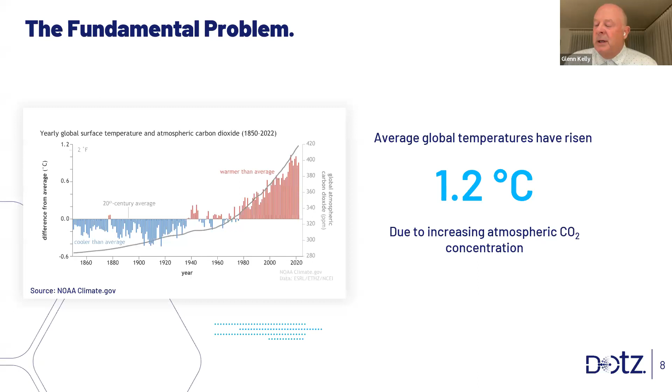Net result of all of this, noticeable impacts in our weather patterns, a heating climate, and heading towards what some may call a climate crisis if we don't do anything about this. So what are the culprits leading to this? What are our biggest emitters of CO2? Simple answer, straightforward answer, where I started my career: fossil fuels, notably coal, oil, natural gas, in that order, added to cement. Cement production, by its inherent process, emits a lot of CO2.

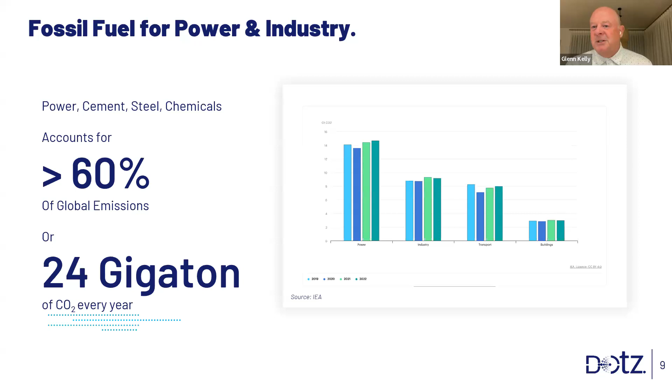So we have fixed sources or point sources of emissions in the world, and then transportation or non-fixed sources. But of the 36 billion tons per year that we emit, or the 36 gigatons per year, 60% of global emissions, or 24 gigatons, come from the power industry and industrial processes. And I must note, though we are embarked on heading to net zero or to use of cleaner technologies, our present use of fossil fuels is still growing.

So where does carbon capture fit into all of this? I was just saying we're looking towards a net zero future. That goes by the use of cleaner fuels and cleaner energy. You think of wind, solar, geothermal, hydrogen, electric vehicles. But in all scenarios going forward, fossil fuels will remain a major source of energy. So to get to a net zero future or a lower CO2 future, the use of those fossil fuels and their emissions will have to be abated, i.e. the CO2 will have to be captured.

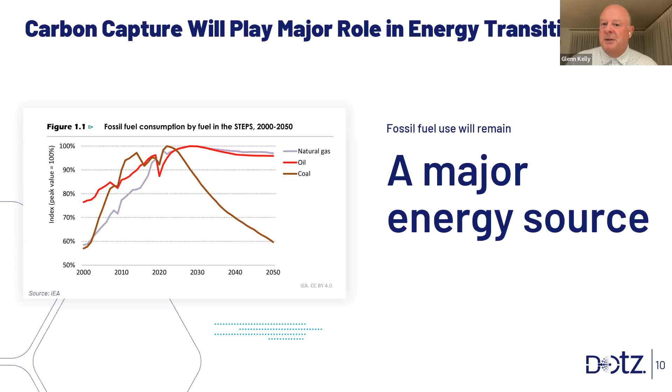So how big is that problem? How much CO2 will have to be captured and sequestered? Well, recall that I talked about the average increase in global temperatures. We're presently at about 1.2 degrees centigrade, and the International Energy Agency and all of our governments have agreed that to have a livable climate going forward, we must limit that rise to 1.5 or a maximum of 2 degrees centigrade. So under that scenario, how much CO2 will have to be captured?

Well, the International Energy Agency estimates that from now till 2030, which is less than 7 years, we will have to be capturing 1.2 billion tons of CO2 per year, mostly from coal, natural gas, oil, and industry. By 2050, we'll have to be capturing 5.6 billion tons of CO2 per year. Sounds like a big task. Where are we today? We have 40 million tons of capture operating today. So our capture capacity on a global scale must grow by a factor of 150 times. So we're already behind the curve. Fossil fuel use is still growing. So the task at hand is quite important.

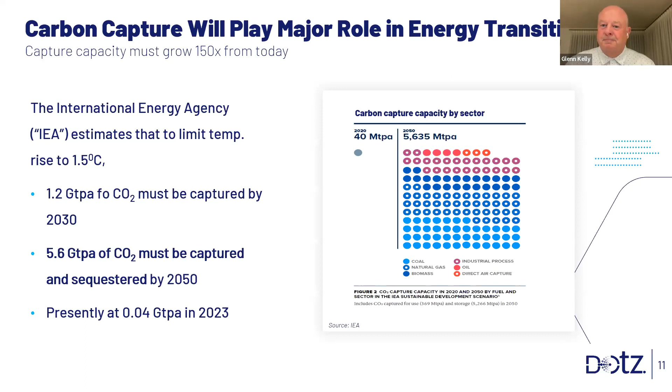So why should anyone capture CO2 other than the negative environmental impacts? What are the economic drivers of doing it? Well, until recently, there was no important cost to emit or no value related to a ton of carbon. Well, this has changed quite dramatically over the last 5 to 7 years. So a ton of carbon is now valued through two pricing mechanisms, either emissions trading systems, the ETS, which is the cap and trade market, notably found in Europe, or through carbon taxes, which is a direct tax on emissions.

Presently, more than 25% of global emissions are covered by pricing mechanisms. Now add a third mechanism to that, which is more the carrot than the stick, and I'm talking about the US approach here, where they have put into place refundable tax credits for capturing your CO2. So when we add the ETS, the taxes, and the US tax credits, over 40% of global emissions are presently covered by a pricing mechanism, which is driving adoption of capture technologies.

So what are some of these prices or some of these values that we're seeing, and how have they evolved over time? Well, if we focus on North America at first, in Canada, the carbon tax is presently $60 a ton, growing to $170 in 2030. The US tax credit is at $85 a ton, so both in the same range.

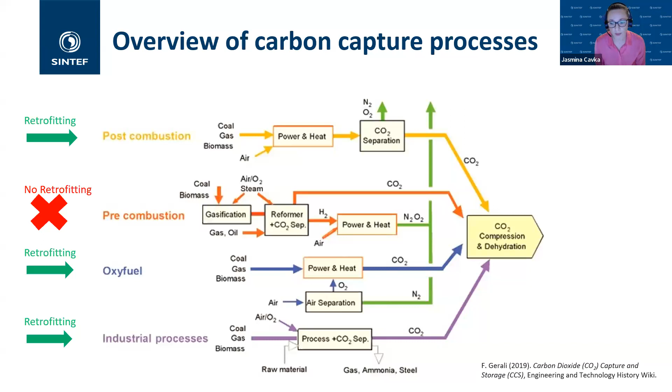And then the last line, which represents the industrial processes, a general presentation of, let's say, main emitters like cement, steel, ammonia production, where the CO2 is emitted from their final off-gases. And again, we have a possibility for retrofitting a CO2 capture technology. And this is where we will also place our focus in the remaining talk. And the adsorbents that I will be talking about are also the ones that can be applied in these 3 lines. Next, please.

So what are the main technologies used to capture CO2? We have 4 categories: absorption, membranes, cryogenic separation, and adsorption. And in the end, we have something that is called hybrid processes, which are actually just various combinations of the 4 other technologies. So I will now go through each one of them and give you a brief introduction of every one of them.

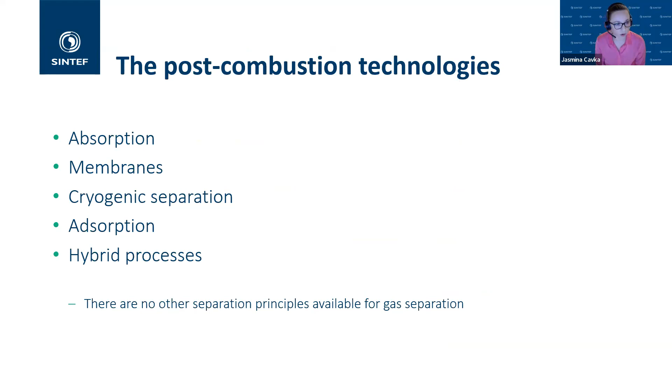Next, please. But before I do that, I would like to present some important parameters that have to be considered before we select our CCS technologies. And this is quite important so that we know what technology to apply to what emission source, because there is a range of different technologies that we can select from. So we have to start by asking, what is the CO2 content in the flue gas? Are there any impurities there that have to be removed before we capture the CO2?

We have to put a target for the capture rate, meaning how many percent of the CO2 from the off-gas has to be removed. What is the purity of the final CO2? What is the target? What are the requirements? What is the energy consumption of the different processes? And does the energy have to be supplied in terms of heat or electricity?

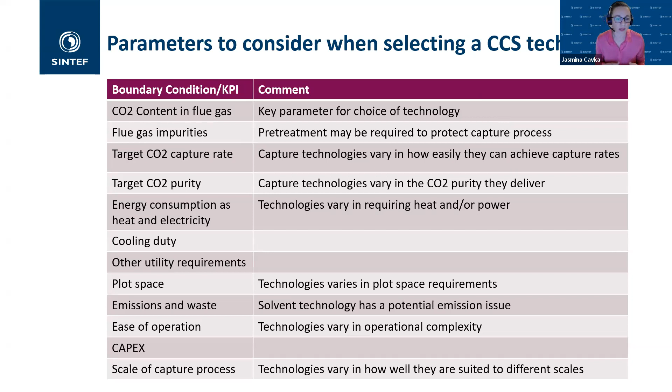And then in addition to this, we need to think of what is the footprint of the technology that we want to install. Are we creating additional emissions and waste that are influencing the environment in a negative way? How easy is the technology to operate? What is the investment cost? And how easy is it to scale the capture process? So all these parameters have to be considered before we make a final decision.

But the good thing with this one is that you capture most of the CO2 from your off-gas. You can achieve capture rates higher than 98%. And the CO2 stream has a really high purity, almost 100%. But as said, it also has quite some drawbacks. So I don't know if one should go in this direction if one wants to capture all the CO2 emissions. We have to consider the alternatives as well. So next, please.

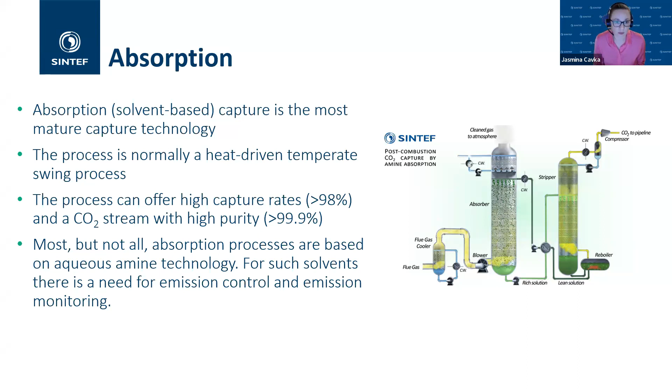Then we have membranes. This technology is appealing because it is operationally simple. You don't use any additional chemicals. You have a membrane, and on one side you have your off-gas, which is then pressurized so that you have a driving force to your membrane. But the material that is used to make the membrane itself only permits certain molecules to pass through, like in this case CO2, and it's also only selective to CO2. When I say only, it's just partly true because some other molecules also get through the membrane. But this is the driving mechanism.

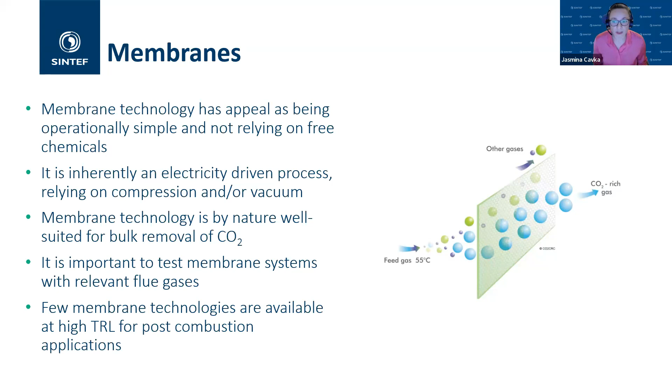This is an electrically driven process. The challenge here is the technology is not that mature, and there are not that many membranes on the market that can actually be applied for this. So you don't have such a big variety of materials that you can select from. In addition to that, the material has to be tested with representative flue gases, not just the model compounds. So still some way to go to commercialize these processes as well.

Then we have something which is called cryogenic separation. What happens here is that you just cool down your flue gas to a point where the CO2 is condensed from the gas phase to the liquid phase, and through this mechanism you separate CO2 from your off-gas. But the challenge is that the majority of the emissions contain large amounts of water, which means that this water has to be removed prior to the condensation of the CO2.

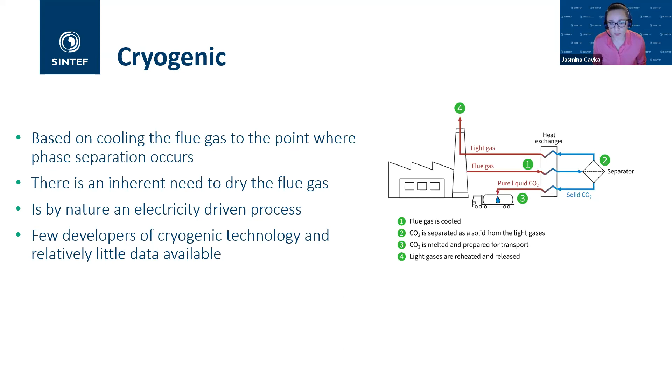So you have a process which is highly expensive because first you have to remove all the water and then condense the CO2. So one is the price, the other is that this process has not been studied that much, not for CCS. There's very little data out there that we can rely on. And it's also a question if there are enough developers that can deliver equipment so that this technology can be scaled up. But there are variations of that technology and others in combinations.

And then the adsorption technology, last but not least, is the one that my group has been working a lot with. This is a process that is based on adsorption of CO2 on a solid state material. And the material normally has to be transformed either into some kind of particles or monoliths before this can happen. Another thing here is that we have a large variety of solid sorbent materials that can be applied in this process. In addition to that, we can have a large range of process configurations. Your material can be put in either as a fixed bed, fluidized bed, or a moving bed.

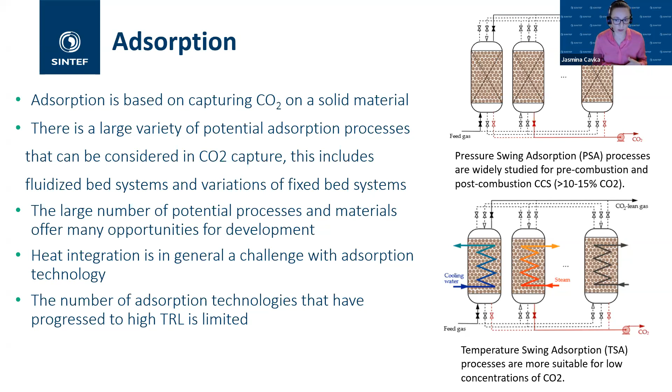Next, please. Yes. This is just a summary of the different technologies, so I think we can skip this one. Yes.

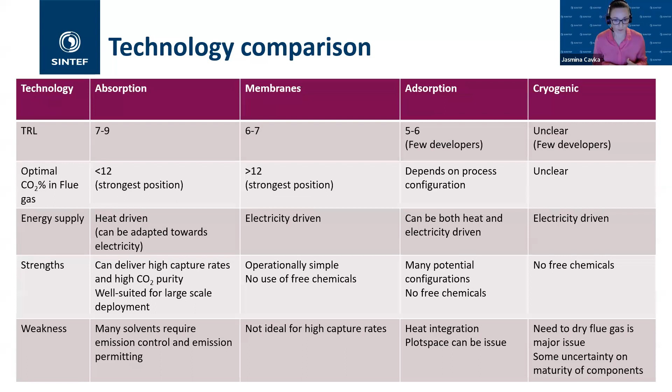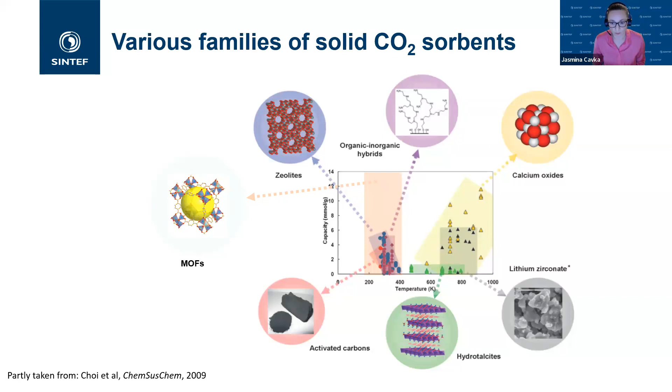Here we have some of the main low temperature sorbents. On the left-hand side, you see those that are commercially available and quite established materials in the market. You have activated carbons that are readily available, easy to make, stable materials. Then you have zeolites that are also commercially available materials, often applied in different industries, particularly in catalysis. You have silicas that are also easy to make and readily available, and all of these can be amine functionalized to improve their properties for the application within CCS.

And then on the right-hand side, you have a younger kind of porous materials that can be applied in CCS, which are called metal organic frameworks, where materials are made out of metal oxide clusters combined with different organic linkers. And you can use almost any metal from the periodic table of elements and a large number of organic linkers, which then opens up great possibilities for designing new structures that can be custom made for the application. But the challenge here is often that these materials are not stable enough and cannot be scaled up for these applications. So next one, please.

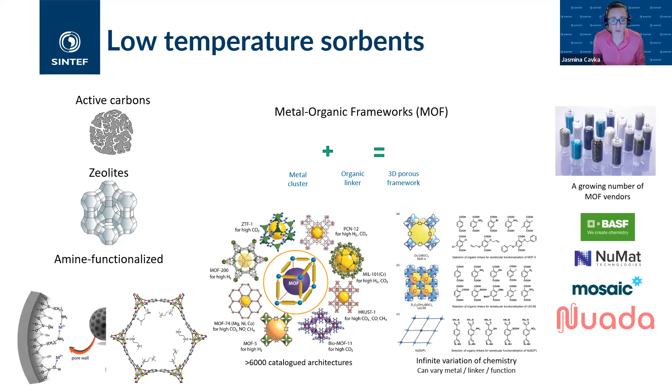But in addition to that, you need to have material which is highly selective to CO2, meaning that you have a good affinity only for CO2, but not for the remaining molecules, so that you can make pure CO2 streams. Your material should be physically stable so that you can have it in the process for a long time before you have to change. And you should also have quite good adsorption kinetics. And with this, I mean that your CO2 should be able to adsorb and desorb from your material quite fast so that you can have an efficient process. You can run fast, more efficiently.

And then in addition, the materials should be easily scalable because we would need tons and tons of these materials in order to apply them in commercial scale. And please just go back once more. Yes, for the MOFs, you can design materials that can have a perfect selectivity or really high capture capacity, but you will miss on the physical stability or the adsorption kinetics, for example, or the material scalability. And that would exclude these materials from, I would say, commercial applications, at least in the near future.

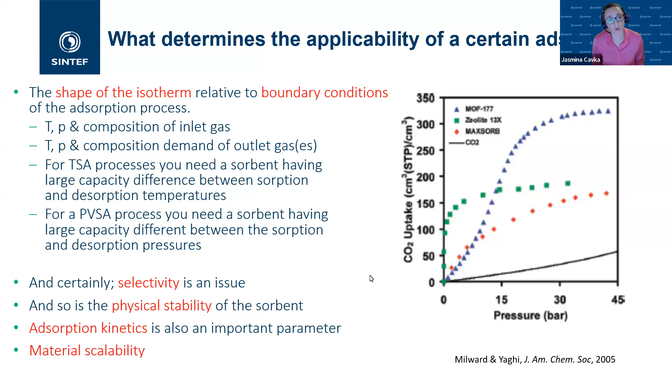And that's why we have to focus on the more established materials that can be made in large scale and that are stable enough, even though they might have somewhat lower adsorption capacity. And in there, I see activated carbons as one of the best candidates. Some selected zeolites, not many of them, and silicas. But these are the three categories, with activated carbons being one of the main ones for the future application in CCS. So with that, thank you very much for your attention.

Thank you, Jasmina, for sharing with us from your experience. And now I would like to introduce our next speaker, Professor Tour from Rice University, who will provide an overview of the innovative technology converting plastic waste into a carbon-based solid sorbent for carbon capturing. Since Professor Tour is based in Houston, Texas, he cannot attend in person given the time differences and provided us with a recorded presentation. Before I start the video, I would like to provide some background about Professor Tour.

So Professor Tour is a professor of chemistry, computer science, and materials science and nanoengineering with over 30 years of experience at Rice University. Dr. Tour has over 650 research publications and over 200 patents, and dozens of successful technology commercializations came out of his lab, including some that you are well familiar with in Australia, like Weebit and Dotz. Dr. Tour was listed among the world's most influential scientific minds and in other publications, and we are happy to have Professor Tour as part of our company as a scientific advisor on our advisory board and as a co-founder of Dotz. And with that intro, I would like to introduce this video.

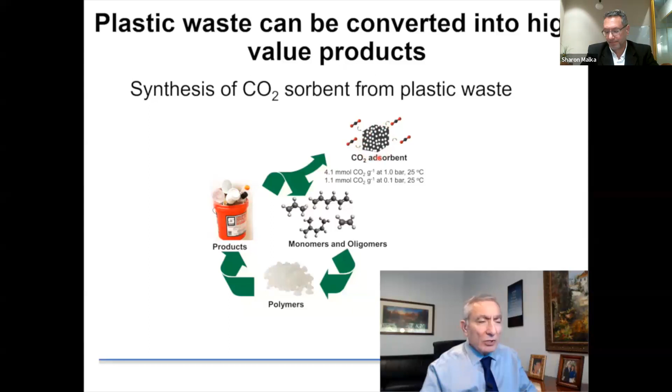Along with that, we have found that many times plastic waste can be pyrolyzed, and it can go into small molecules and then circled around and made into new polymers. What we have found is that if we add a compound like potassium acetate, we can actually get this CO2 sorbent to form a carbon material, and we can use this carbon material to trap carbon dioxide.

And so 60% of all CO2 emissions are from large stationary emission points. So they're not coming out of the back of a car, which is moving around. They're from stationary emission points. And so this is what we're going after.

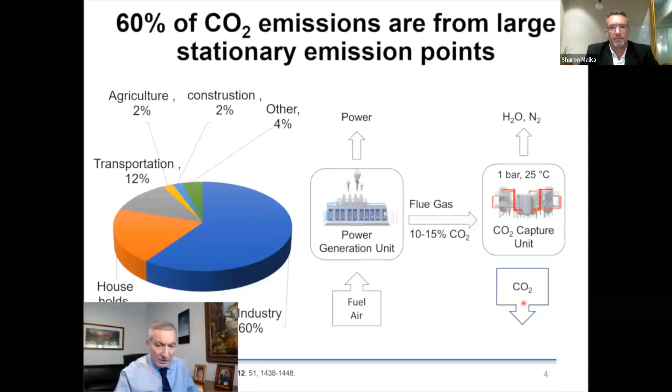This is the type of work that we're trying to do, is to say, can we make a system that could trap CO2 from flue gas? So for example, you'd have a power generation unit, and the flue gas would be captured, and we capture the CO2 from that flue gas. That is the area that we're trying to look at here.

Now, what's done today is liquid amine towers are currently used in industry for post-combustion CO2, where you take an amine, you trap it with CO2, and so it takes two amines to get one molecule of CO2, and then you regenerate it by heating it to 120 to 140 degrees. Keep that temperature in mind.

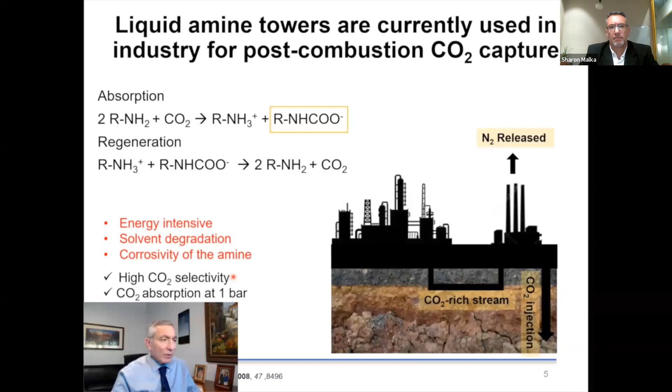It's energy intensive, you get solvent degradation, and there's a lot of corrosivity with the amines. But it has high CO2 selectivity, and it can absorb carbon dioxide at 1 atmosphere pressure. What we are going toward is solid sorbents. There are other solid sorbents on the market.

There's something called MOFs, metal organic frameworks. Those have good CO2 capacity, good selectivity, but generally they're not water resistant, and generally they're expensive. There's other zeolites you can use, and often they can have good capacity, good selectivity, but the regeneration cost is high.

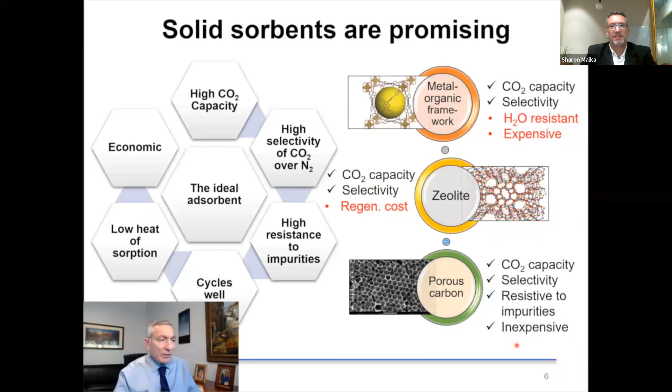We're going toward porous carbons, where they have high CO2 capacity, selectivity, they're resistant to impurities, and they're inexpensive. That's what we'd like to look at in what we're making.

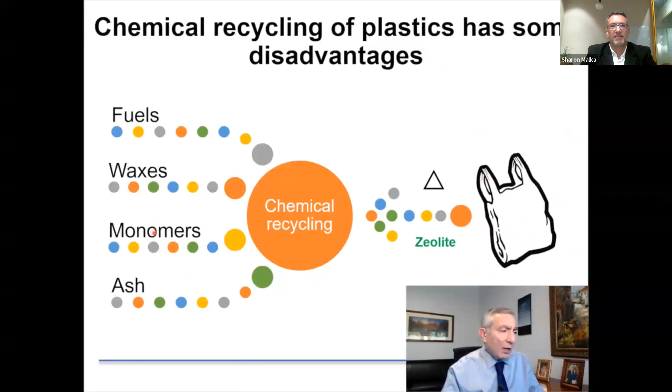And there's another process that's out there for taking waste plastic, and you can heat it up in the presence of zeolites, and you can generate fuels, waxes, monomers, and ash. The difference is that we are doing the same sort of thing, but we're adding a few other compounds to it. And what happens is we get paraffins, linear alpha olefins, and other building blocks, as well as a porous carbon on which you can trap CO2.

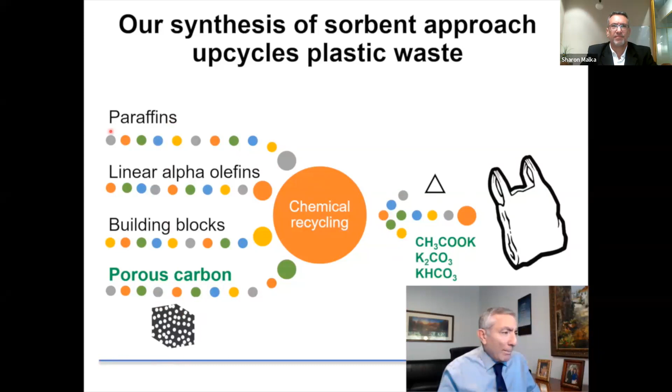So we're taking a waste product, waste plastic, and using it to trap CO2 while making other things out of the plastic. And that's going to really help in thinking about this process. So this is HDPE, high density polyethylene derived systems. We can generate it with a high surface area.

So if we're adding 4:1, 4 parts of potassium acetate to high density polyethylene, and heat it to 700 degrees, we can get a material that has a surface area of almost 1,300 meters squared per gram. The key here is most of its pores are less than 1 nanometer in size. That's going to be really important for trapping CO2, because CO2 is less than 1 nanometer in size.

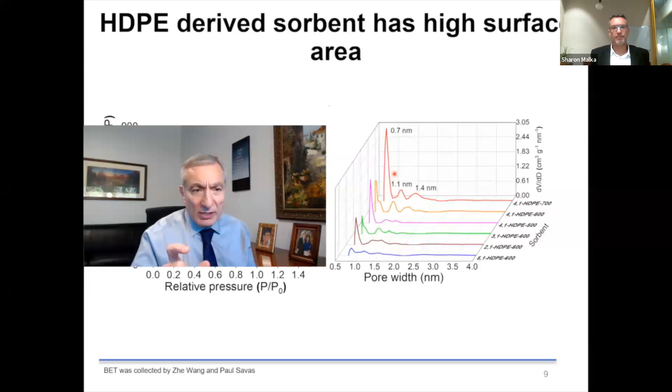And so this high density polyethylene derived sorbent has high CO2 uptake. So you see it at very low pressures. This is the pressure in bar or atmospheres, the same thing. It rapidly absorbs CO2. And flue gas is generally at 1 atmosphere of pressure. So this is that bottom part just expanded.

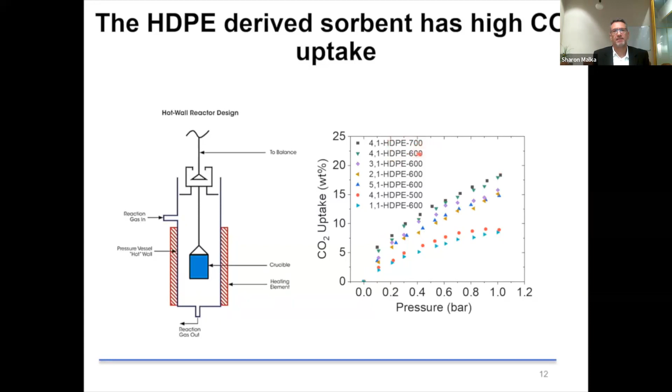And you can see that at 1 atmosphere, you have about 15 or 16% uptake is what we were getting on the CO2. And this is using this 4-to-1 and heating it to about 600 to 700 degrees. So taking potassium acetate and high density polyethylene, we could activate it, and 4-to-1 was our best ratio to do this at.

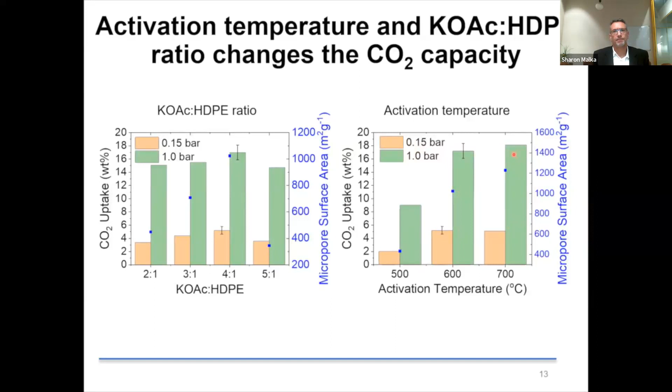And then we were activating it at about 600 to 700 degrees. And we can get this high uptake material, which is almost up to 18% by weight CO2 capture. We also studied very carefully the temperature at which we activate this. And if we activate it at 700, it's actually best. So you can get the highest percent uptake at 700 degree activation as we make this material.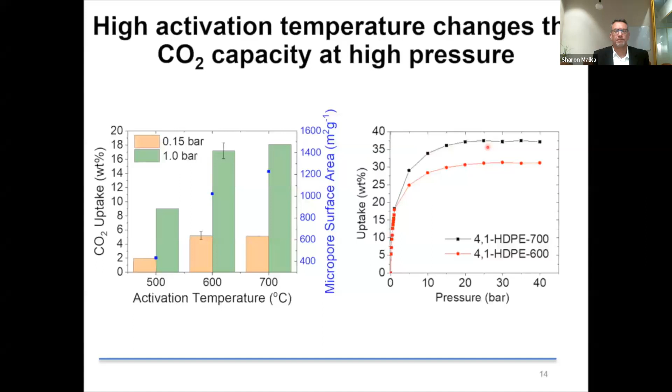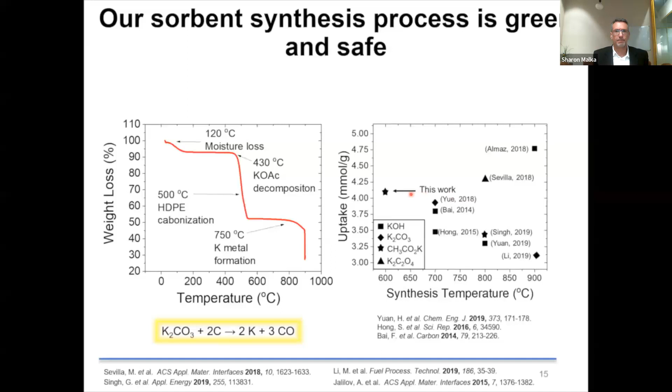Our sorbent process is green and safe in that we don't exceed 700. As long as we stay below 750, we don't generate potassium metal, which then would make it a more dangerous process. So we stay below that, and you can look at where our work is compared to a lot of other work in the activation temperature that they need. We can do it at 600, we can go up to 700, but we're below where most people are heating their material.

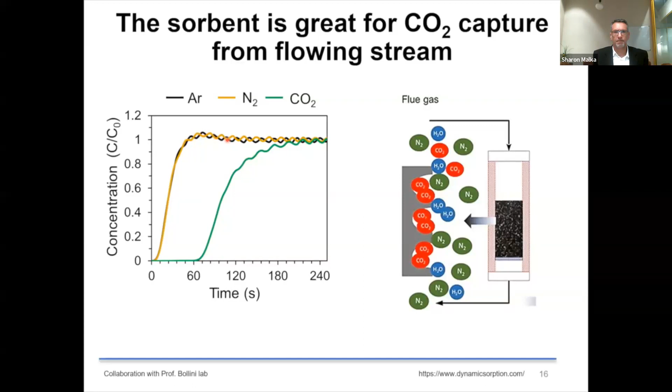And here's the CO2 uptake in a flowing system, because this is what we're going to be having. And you see that argon and nitrogen are not retained by this sorbent, where CO2 is retained. That's what you want. You want CO2 retained. You want inert gases, particularly nitrogen, which is what most of flue gas consists of, nitrogen. You don't want that retained. And you can see the difference between the uptake of CO2 versus the uptake of nitrogen. And this is very important, that you have a good selectivity of CO2 over nitrogen, and that's what we've got.

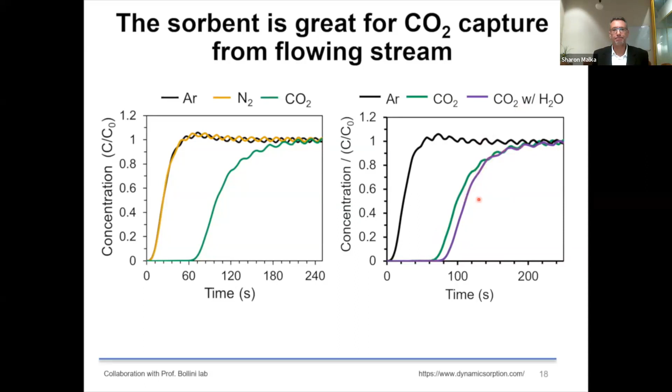And now you can see that we can even do this under real flue gas type conditions where we have added water in there. So when you have a flue gas, you have CO2 coming out, you also have water. And so adding water to this does not inhibit the capture of the CO2. So this is under more realistic flue gas conditions.

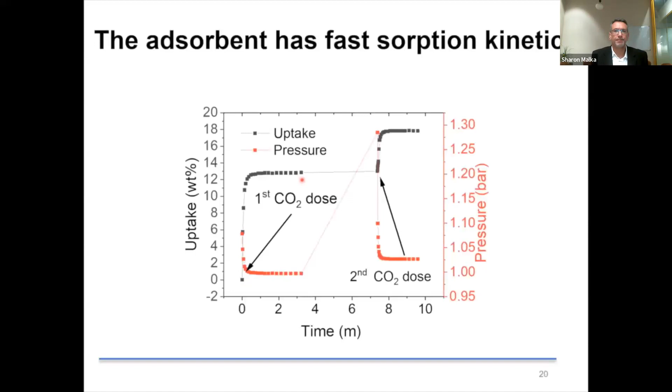Now the sorbent can be regenerated. We can regenerate this sorbent at about 75 degrees. If you remember, the aqueous amine towers need 120 to 140 degrees. 75 degrees can be even just excess industrial heat from other processes. Once you get up over 100 degrees like that, then you have to use superheated steam. So this can be regenerated much more easily without as much energy in the regeneration. And the pickup is very fast. It kinetically traps the CO2 very, very quickly.

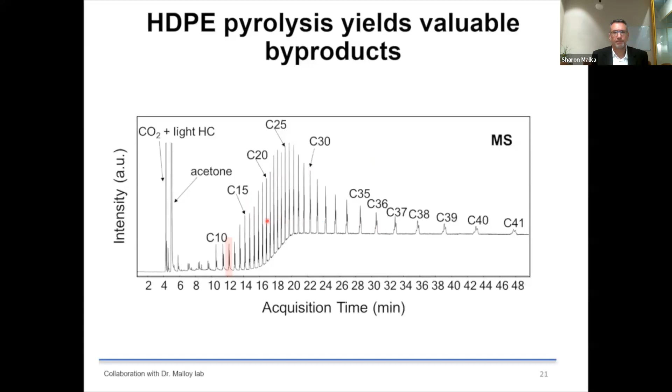The other part about this process is that from the plastics wastes, in addition to forming this material that can adsorb CO2, we're generating a lot of other byproducts that have high value. These are alpha olefins. This is what we detect in our system, these alpha olefins. And when we look at this, these are hydrocarbon species that are alpha olefins. And so if you look at the price of these, you can sell these alpha olefins. And so you're generating a product that you can also sell, which can make up for the cost of even making this material. So you can see all the different products that you can generate through that.

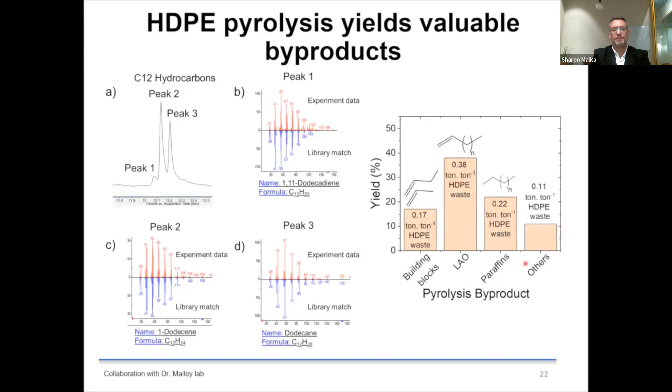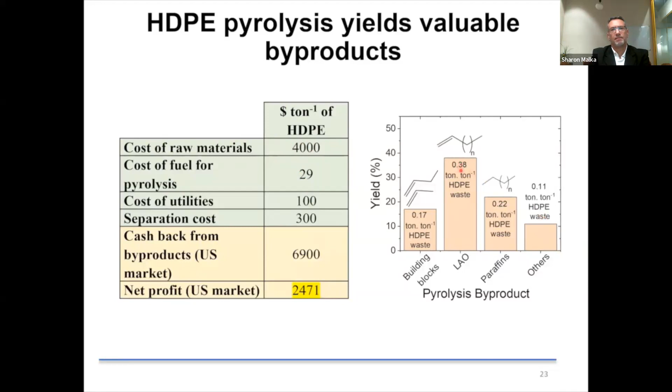And Saudi Aramco actually helped us to crunch some of these numbers with my student Wala Algozeeb, who worked for Saudi Aramco, and then she came here as a graduate student for 4 years and then went back. And if you look at the cost of the raw materials, it turns out that if we sell the materials on the US market, there can be even a net profit just from the waste materials that we generate, particularly the alpha olefins that come off. So this is a way to even do this in a way to make money, to make the material.

And then it works with all different types of plastic, as well as with textile and construction plastics. Half of all plastic waste is not the type of things that you and I normally think about. It's from construction plastics and textile plastics, things that cannot easily be recycled. You can't recycle these because a lot of these are thermosets and not thermoplastics, but this even works with these systems.

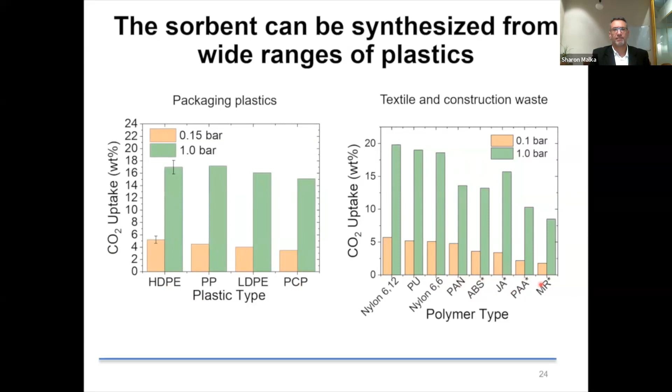And so in conclusion, we've come up with this system where I think that we could possibly make money making the material and then make money using the material to trap CO2. So we're taking waste plastic, which is a real problem, making a material that can capture CO2, and then make other compounds that we can sell into the chemical industry.

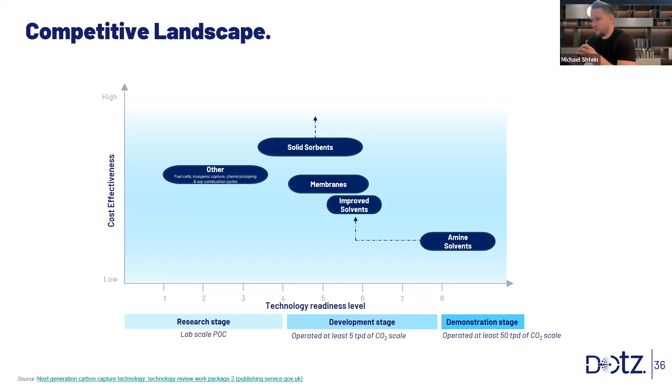So at Dotz, we do believe that the technology that we license is the future of industrial carbon capture, since it simultaneously addresses two of the most acute environmental challenges. First of all, plastic pollution, which is the source of our process, and carbon sequestration. It represents the next evolution in carbon capture technology, offering an efficient and sustainable approach to drive industrial decarbonization.

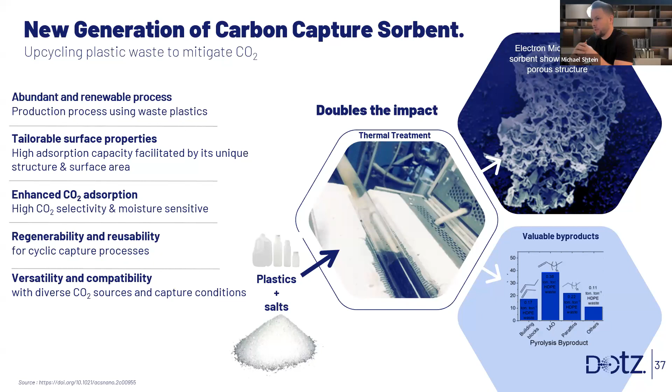We believe that we have a differentiated technology with clear benefits that can make a real impact. The technology provides a renewable, simple process from waste plastic. The sorbent has a high adsorption capacity due to its unique structure and large surface area. It has high selectivity. It is regenerable and compatible with diverse CO2 sources. Next slide.

At Dotz, we generated a clear development roadmap to advance our technology through commercial development with multiple value creation milestones. And we set the following development objectives. The first one is the optimization and scale up of the sorbent process from the milligram scale that we licensed from Rice University to kilogram quantities, and we're doing that as we speak. This will be followed by design and development of the bench scale unit, or BSU.

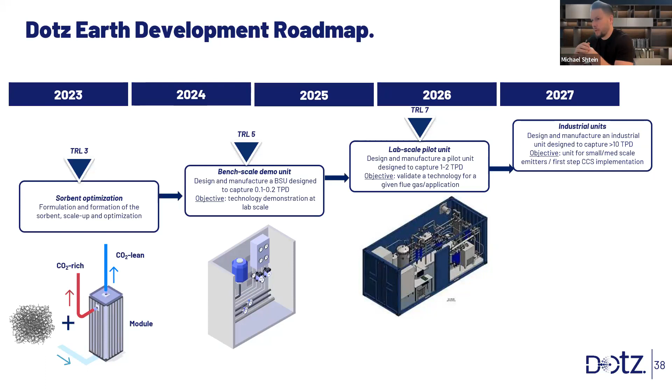This stage will enable us to demonstrate the technology capabilities and validate its techno-economic parameters toward an industrial pilot. And ultimately, we are aiming toward the design and construction of large industrial pilots, and I will briefly present its conceptual design in my next slides. Specifically regarding the timelines, we plan to optimize our sorbent and meet the goals of the BSU within the next 9 to 12 months, and we will leverage the SINTEF collaboration and extensive experience to expedite that. Next slide, please.

So we are planning to design and implement a simple, straightforward, and modular process, which will be based on several parallel columns. These columns will be packed with Dotz solid sorbents, and will continuously capture carbon dioxide from a point source emitter. A typical CO2 capturing process will be based on the following steps. In the first stage, the CO2-rich flue gas from a point emitter will enter the Dotz capturing process. Our sorbent in the first capture column will selectively separate the CO2 from the flue gas.

The CO2 will be adsorbed in the pores of the carbon-based sorbent through physical bonds, and then a CO2-lean flue gas will be released into the atmosphere. Once the carbon-based sorbent is saturated, it can be regenerated. During this regeneration process, the CO2-rich feed gas will be diverted to another parallel column for continuous removal. During the regeneration, vacuum or heat will be used to release the captured CO2 and regenerate the sorbent. The released pure stream of CO2 will be compressed and liquefied, and then transported via pipeline to be safely stored or used.

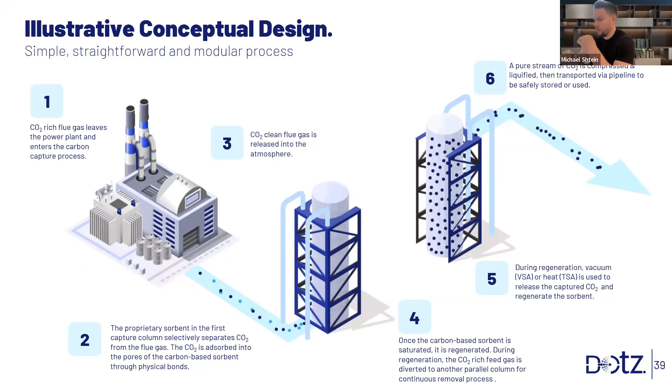We plan to expedite our research and development efforts by establishing strategic development collaborations. And as the first step toward that goal, we recently partnered with SINTEF, one of Europe's largest independent contract research organizations. This collaboration will allow us to advance and optimize our Dotz Earth technology, leveraging SINTEF's extensive experience in the carbon capture and storage sector. And we believe that with the collaboration with Rice University and SINTEF, we have a superior development team that can advance the Dotz development program toward achieving our goals. Our initial focus, like I mentioned, will be to advance the development program to the bench scale unit, technology optimization, and scale up. Next slide, please.

So to conclude, we believe that solid sorbents, and in particular carbon-based sorbents, are a game changer for the carbon capture industry. Once developed, this technology can provide emitters an energy efficient and environmentally friendly carbon capture solution. And the combination of its high adsorption capacity, its selectivity, and expected low cost of ownership will make it ideal for industrial point source carbon capture.